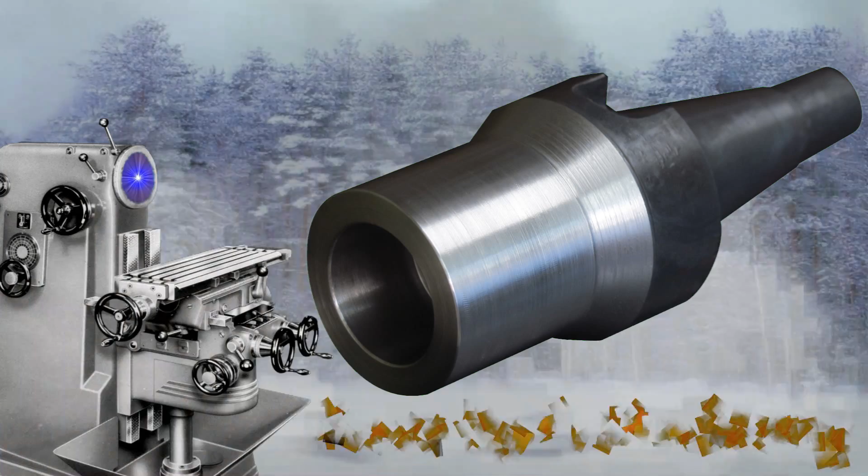In this episode of Finno-Ugric Machining, we are going to make an adapter for my milling machine for slitting saws. For now I have been using the ER40 collet with an adapter attached into it, and then you have the slitting saw. And it seems to be not rigid enough. At least it introduces some random play into the slitting saw. And I don't like that.

So I would like to have it directly in the SK30 thing. So what we are going to do today is something like this. We make this taper and this, and then this is an ER25 collet. But this end will be turned into a precise diameter, and then you have sleeves which you use for different sizes of slitting saw center. So that will be fun. And the material then.

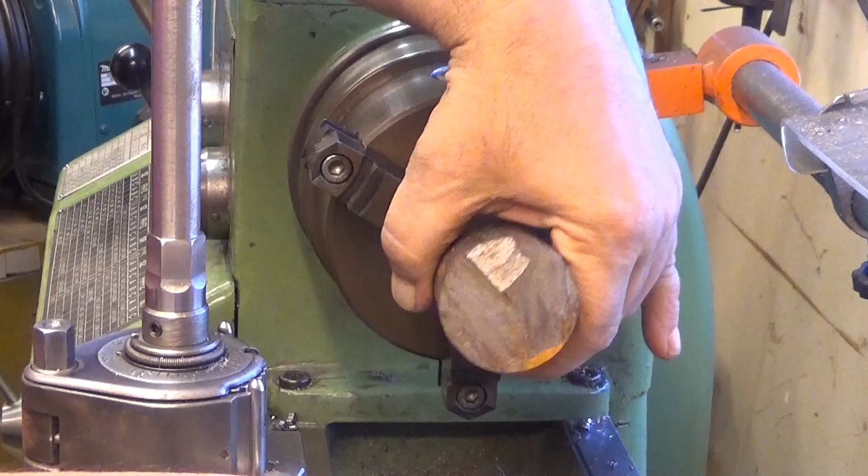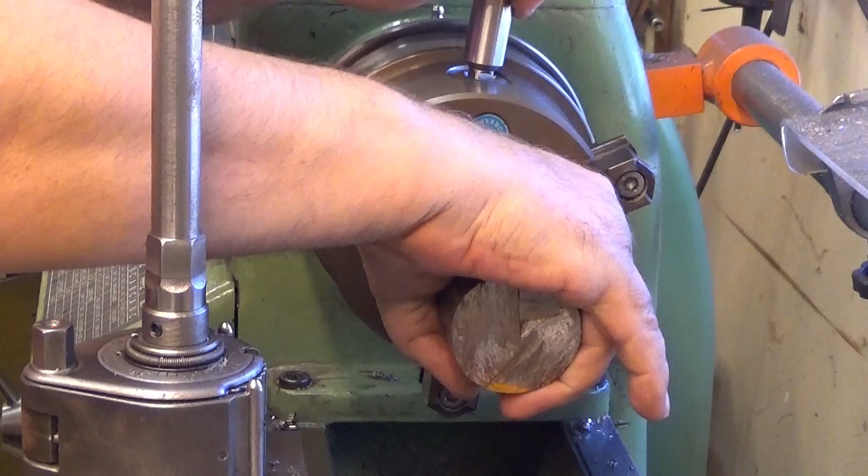One of the pieces I got off, and now, I really don't know how this machines. It might be really tough or not, but let's put it there and try it out. Okay, the outer surface is a little bit rough. Well, it's about straight. Now I just tighten this there. I will first face this, and after that I will make a surface here so that I can grip it into the jaws reliably.

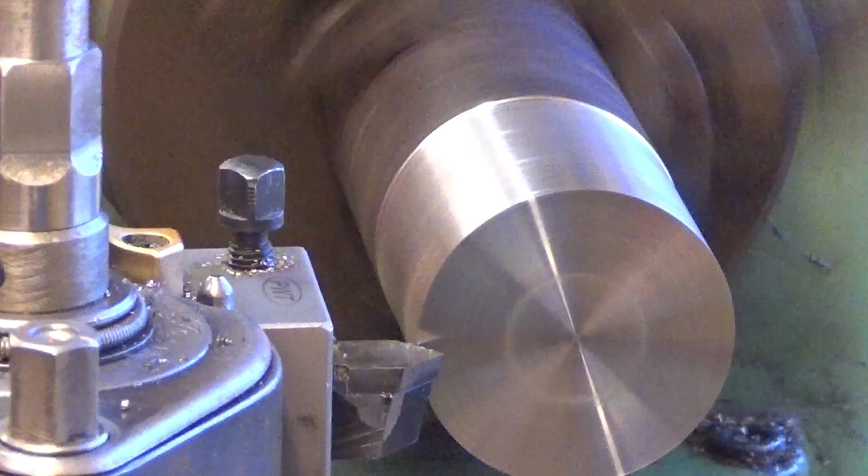Oh yeah. That's it. Yeah, okay.

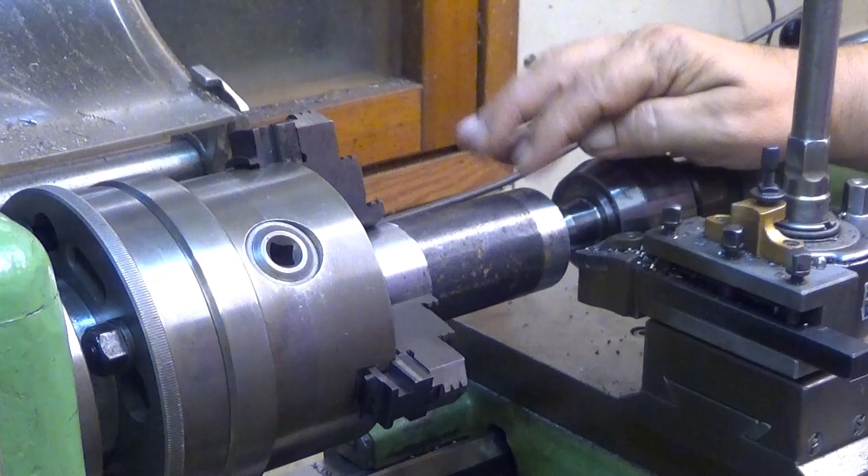After facing now, I'm going to rough this. The biggest diameter here would be of course this 50, but this I don't touch. And then the next diameter is 31.75. That one I will now rough turn, and it will be from this point here up to there, it will be 63.60, so because this is roughing, I will do it 63. The remaining 0.6 millimeter I will do when I finalize this.

So now this is just turning and yet turning. I already started here a little bit, so let's go to there. So now, enjoy.

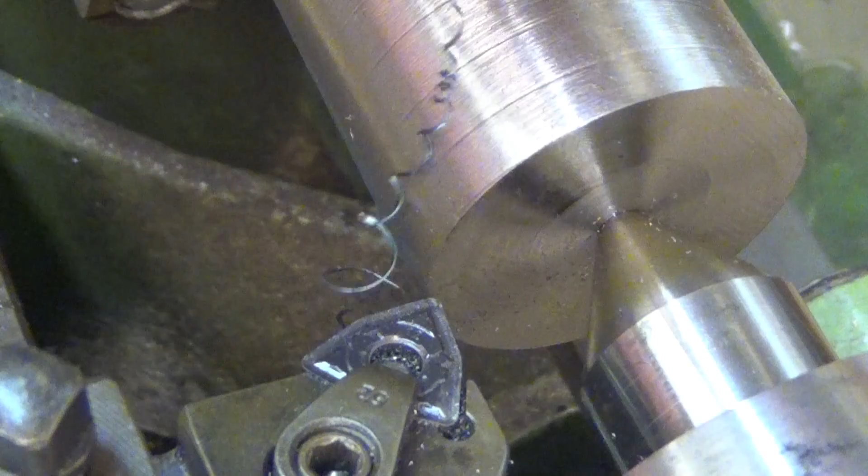This must be one of the hardest steels I have ever been turning. Well, first of all, the chips. Even though these chips turn blue like this, they are still not crispy. Usually when you get chips of this color, they crumble in your hands, but these, oh no. And it's quite hard, not really hard, but quite hard. But that's actually a very good thing. When I get this done to the correct dimensions, I have a very, very stout tool. So yeah, okay.

I'll take that. At the moment we are around 40 something. We have 11 millimeters to go from the diameter here. The speed at the moment is something like 400 revolutions per minute, and the feed is 0.076 millimeters per revolution, and the depth of cut, I'm taking 1 millimeter from the diameter. This lathe can do it, but not much more than that with that material. This is not aluminium, not at all. So it will be 1 millimeter cuts.

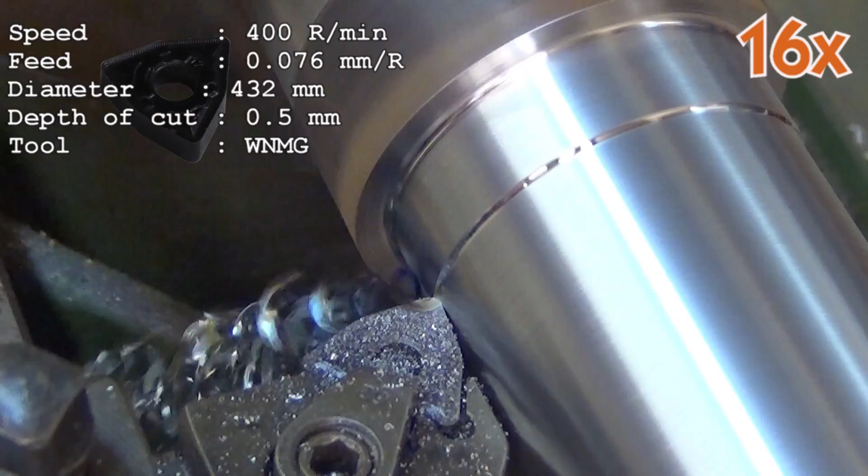Well, 9 more to go, and it's hot. I want it to cool down now. So, our goal here is 32 millimeters. The final dimension will be 31.75, but I will leave that much for the final passes, which are not done with this tool. And the surface is quite rough. 2 millimeters to go. So let's take the first one now.

Oh yeah, one thing: I had a cup of coffee and let this cool down. And it loosened the tailstock because this really cooled down. With thermal expansion, it shrinks and it detaches from the tailstock. And in this case it's a very bad thing because it will cause vibrations. So now we go. And this is faster now.

So, well, I finished that surface already. The diameter is at the moment 31.75 millimeters. Really, it should be 31.75. And it is exactly. My next step is to make this surface here in the back, the back face here.

I already peeled 0.1 millimeter off from that. Now I should peel off furthermore 0.5 millimeters. And this is a little bit delicate operation. I have adjusted this so that when this dial is at 0, the tip of this tool is exactly on that surface. And then I can advance with the compound, and I do this like 0.1 millimeter at a time,

because this is some really hard shit. I cannot peel any more. And the tool is a little bit tilted so that it doesn't start to vibrate. Well, so that's what I'm going to do now 5 times.

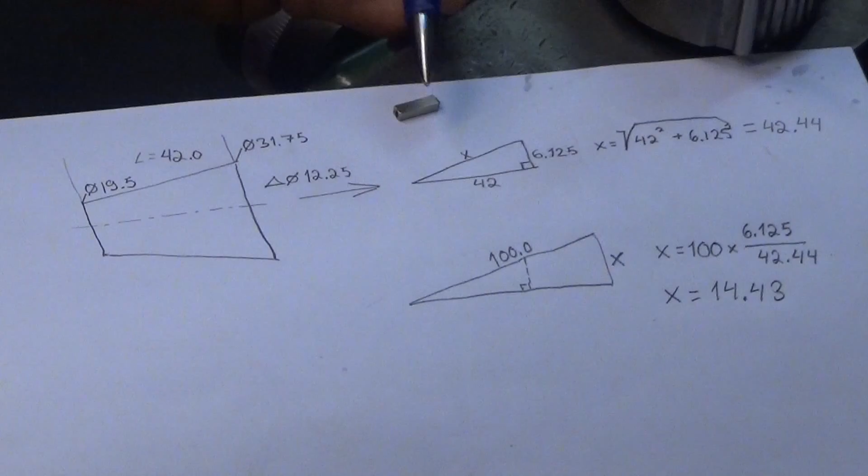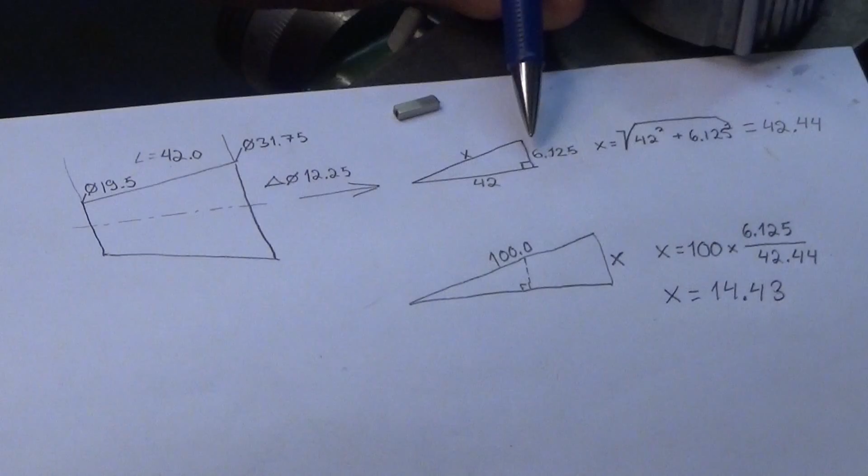Okay. Well, then we just create a triangle like this one. There is this 90 degrees angle. Then we have a side which I have marked as X. We don't know how long that one is. Then one side is 42 millimeters, which comes from the length. And this side here is half of the delta, so it's 6.125.

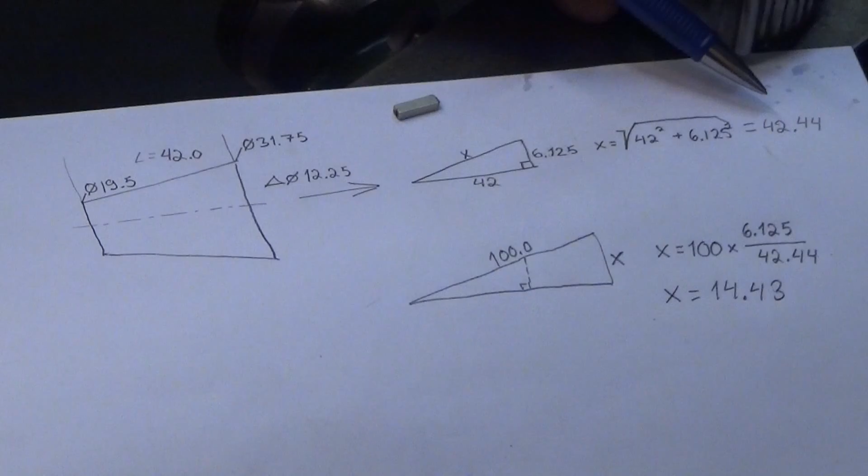And, well, this is just Pythagoras. So to get this one, we take a square root out of 42 squared plus 6.125 squared. And this will yield 42.44 millimeters.

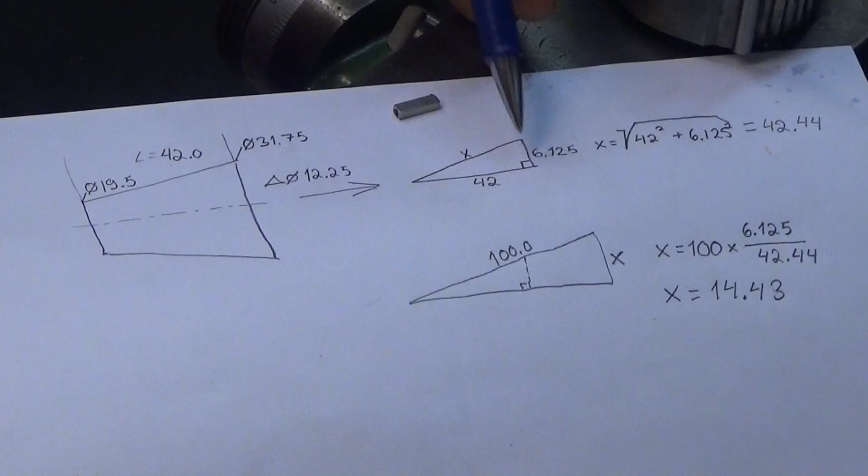Okay. Well, then assume that this triangle is like here. But now we need this side to be 100 millimeters. What will the X be? Well, it's actually very simple calculation. It's 6.125, which is this here, over 42.44, which is this here, and then multiply this by 100. And there you are. Then you get the new X, which is 14.43 millimeters.

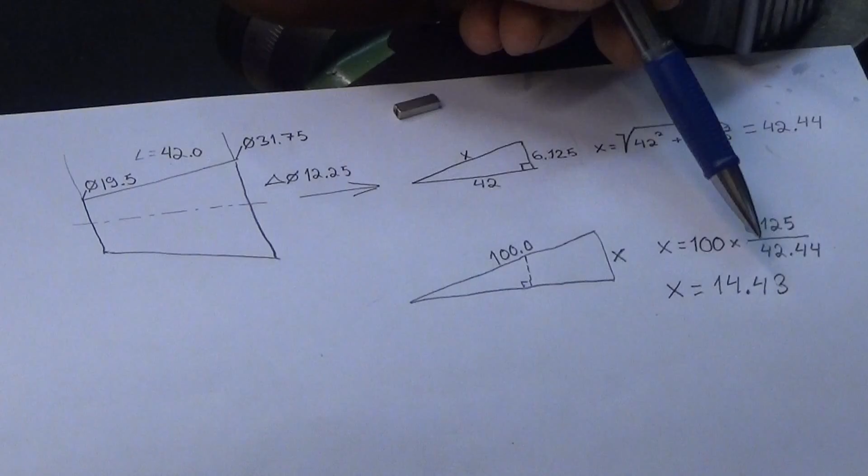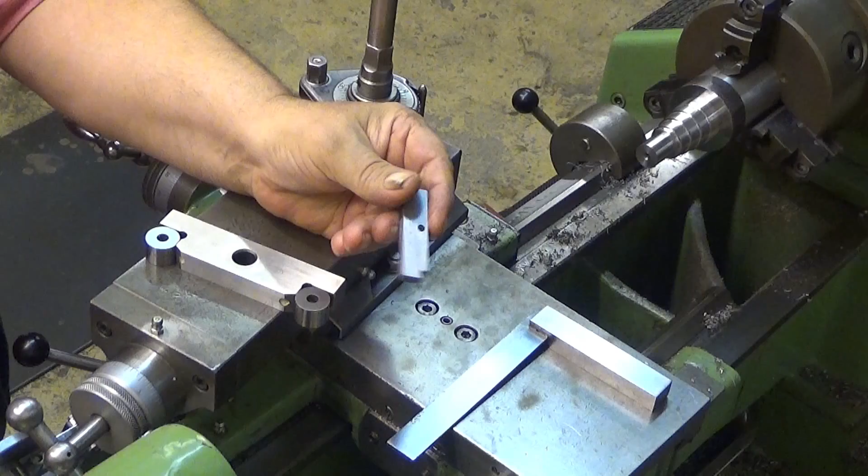And now, why 100 here? Well, let me show you. I have a sine bar. This one. This is 100 millimeters. The process needs three components. First of all, this one. The height of this is 14.43 millimeters. It's the X here. That's one. Then we need this 100 millimeter sine bar, which is this one here.

And then I need this to adjust it with the sides of my carriage. Well, then we just put this, and it goes without saying that when you do something like this, everything should be absolutely clean. Otherwise you don't succeed. Okay, then I put this here. And then this is my machinist square, so to say. I put it together, and I already adjusted this.

But what I do, I put this tightly against the side here, and then I push this gently here until it stops. And then I try if I can wiggle it on each end. No, I cannot. Okay. And same from the other side as well. This is just to make sure. Let's put it like that. That was a little far away. Okay, now it is.

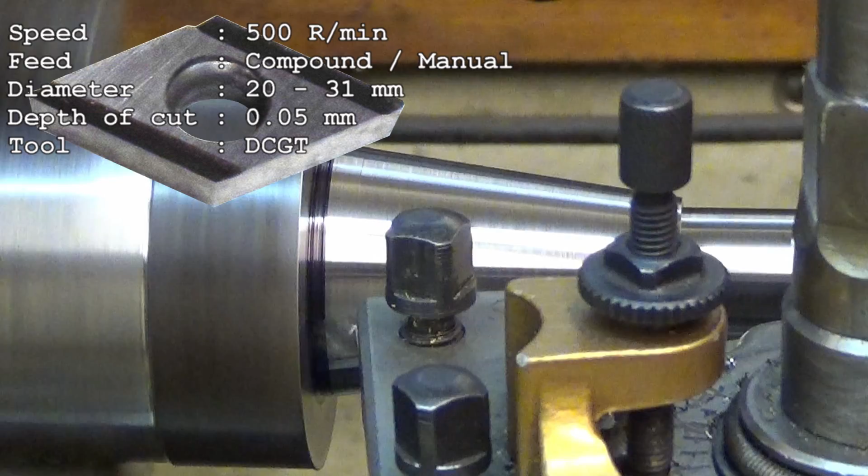It's ready. Very good finish, and yeah, okay. It's a good taper. Well, as the last step before going over to the milling machine to do something there, I will take care of this surface. My first thought was to leave this alone, just to let it be like it is, because now it's quite exactly the required 50 millimeters.

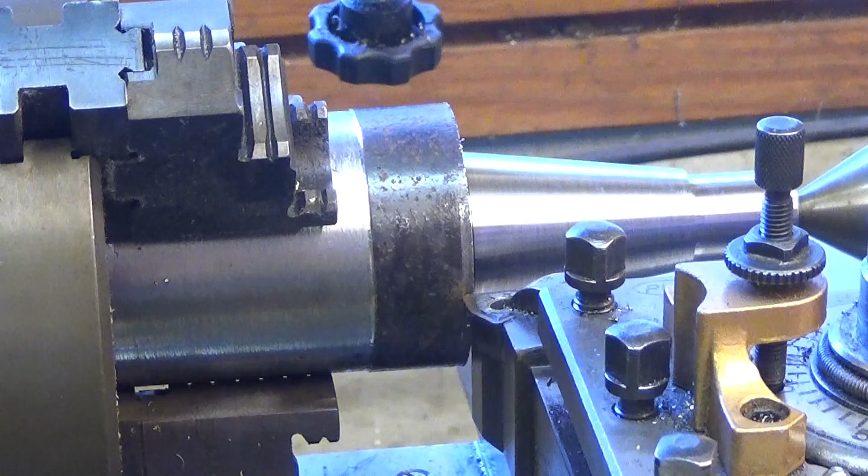But, well, the diameter of this surface isn't that critical. It can be a little bit undersized. So I will actually just clean it up. Peel off enough so that I don't have any of these. It's a little bit pitted, and well, it's easier to keep it clean when it's like that, if nothing else.

Milling the slots for the drive dogs in the spindle. And these slots should be 16.1 millimeter wide, and they should be in the X direction, this direction. They should be like 8 millimeters, but since this is a 10 millimeter end mill, I need to put some extra because of the radius. So 13 millimeters down there.

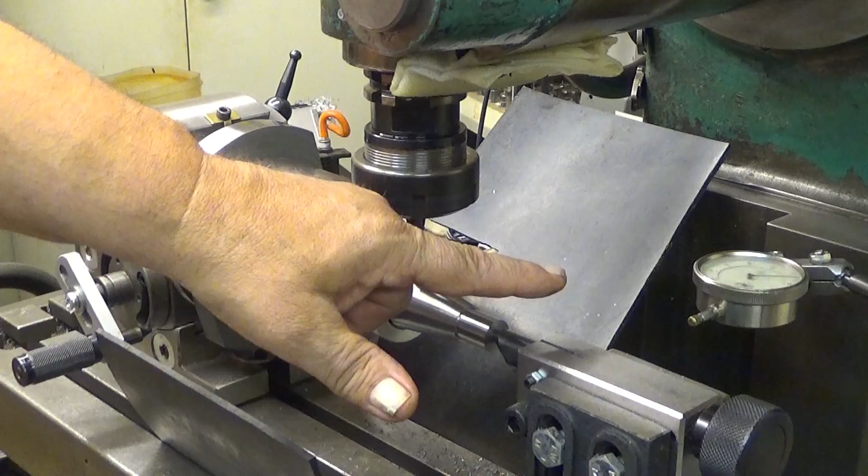And the diameter when these both are finished should be 32.4 millimeters. So these should be milled down to 8.3 millimeters each side. So I have a dial indicator there, which is used to measure the Y deviation, because this mill has a lot of backlash in both X and Y directions. So that was the most convenient way of getting rid of that.

So I'm running this 10 millimeter end mill at like 500 revolutions per minute, and I'm milling 1.5 millimeter layers at a time, because this material is really hard. So I don't want to strain this setup.

Something about this setup: I'm using the dividing head as a chuck here to hold the piece, and then I also can use it to turn the workpiece 180 degrees, because there needs to be another exactly on the other side. Then it's really important to have the tailstock here, because the cutting forces are both ways depending on which side I'm cutting. There will be also torsional forces when I'm cutting this end here. So everything must be quite tight and locked. So let's do the rest of this slot now. And I'm feeding this by hand.

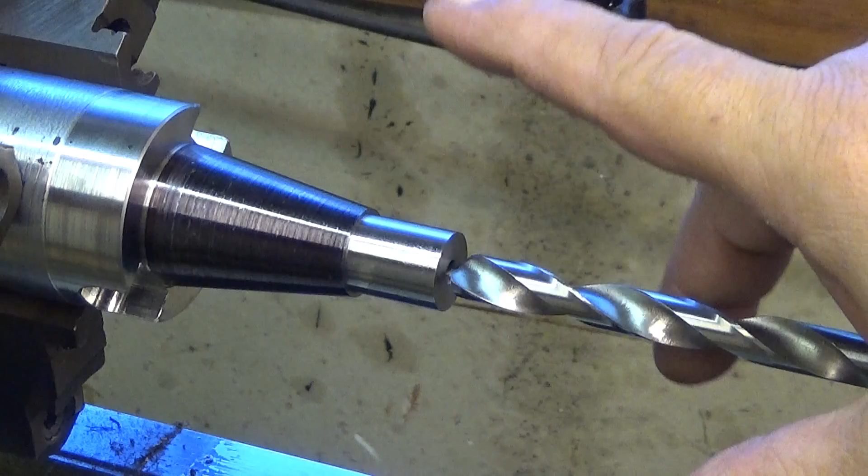Cutting size for M12. Well, some documents say that it's 10.3 millimeters. This is a 10.2 millimeter drill, and we shall see how we do with this stuff. I'm running this rather slow, somewhere around 180 revolutions maybe. This was really hard material, so let's see how this goes. And the depth of this hole should be 33 millimeters.

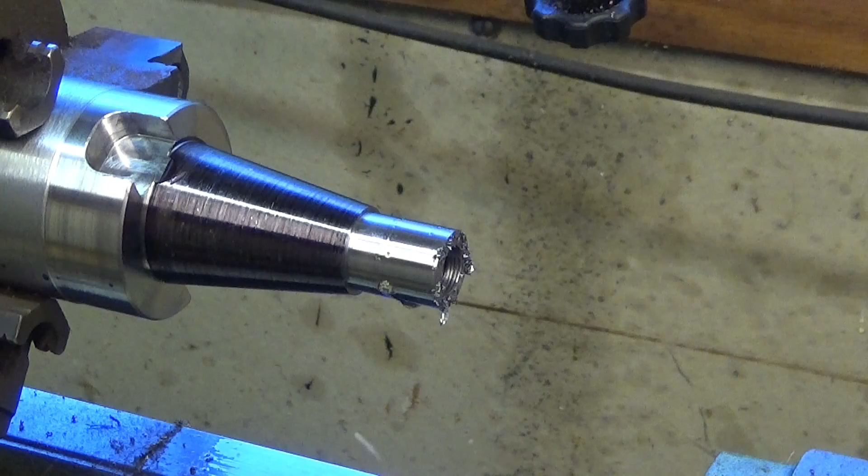Well, deep enough. That was not fun at all. This is like really hard stuff, man. Now, threading this M12 thread here. There is a real possibility of breaking my tap in this hole because this material, well, it's really tough.

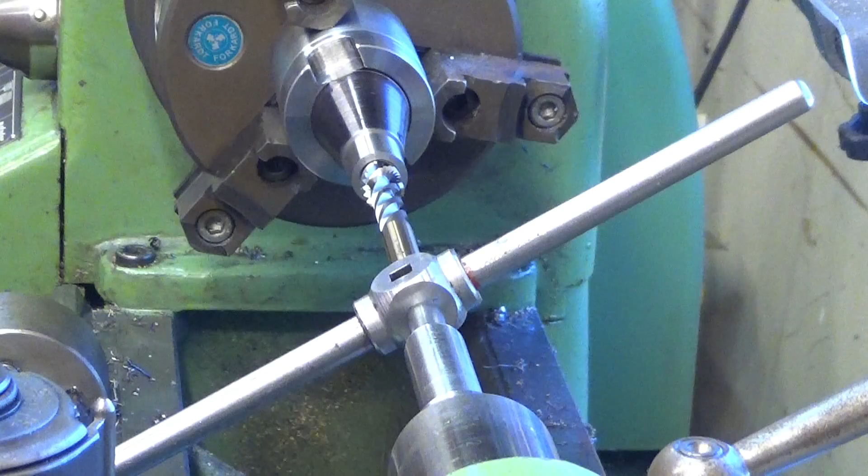At some point I did say that it's from a cardan. No, it's not a cardan. It's the power shaft of a lorry. I don't know whether it is really power shaft in English, but it's the last thing that connects the wheel to the, well, it's the last bit of powertrain, so a lot of torque in this one when it was in its original use. So let's see now.

It doesn't want to start even. Now it started. Okay. Oh, it's really tight. Really tight. Oh man. Am I sure I want to do this? Oh, this will be really... I want to position it. Okay. What now?

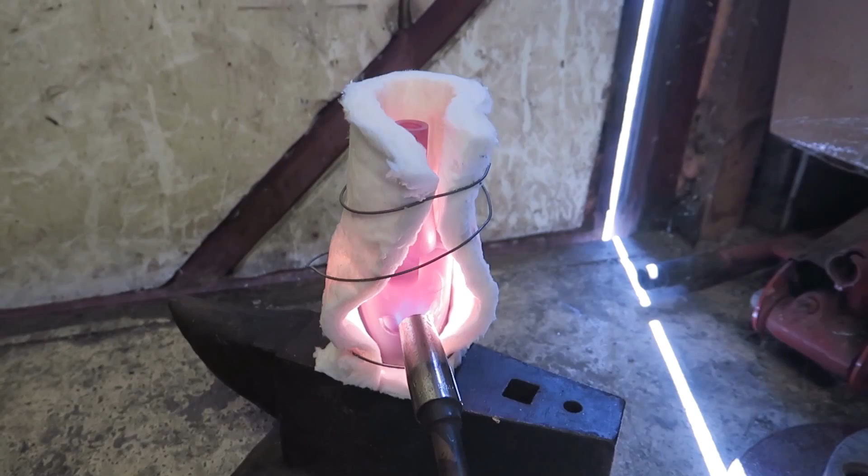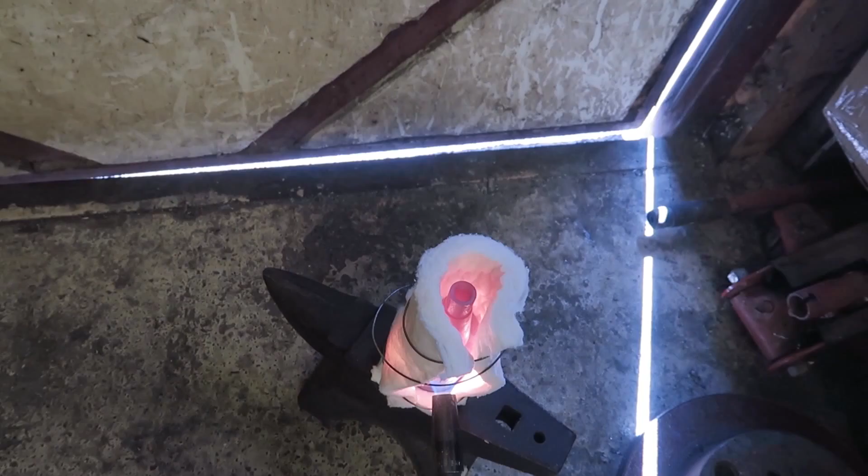I decided to anneal this darn thing. Annealing is actually a very simple process. First you just warm up the workpiece to high temperature, and then you let it cool down. The temperature should be, in this case I believe, somewhere around 600 to 700 degrees Celsius, and then it should be left alone, cooled down really slowly. In my case, it took about 4 hours. And after that, well, let's see.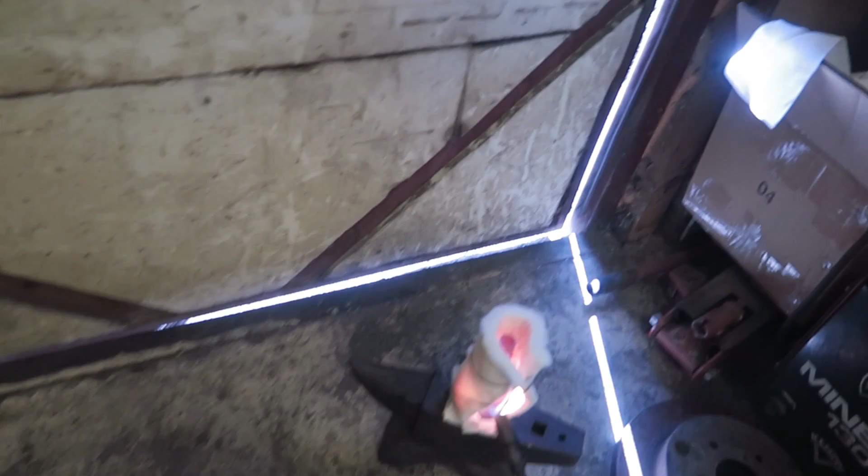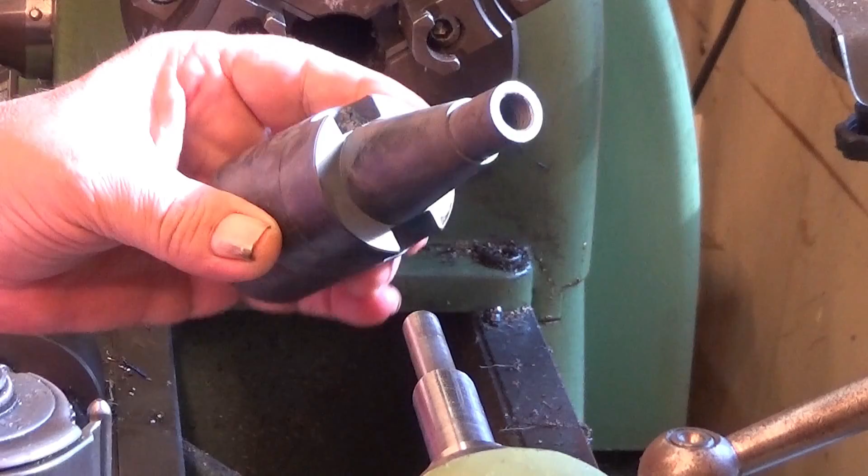Okay, here it is. No more shiny. But it's sure annealed. Or at least I hope so. So, did I learn something here? Yeah, I did. Never use mystery metals. Let's put some Rocol paste there, inside there. If I can now get it.

This will be hard to get out from there once I get it in. Okay, and then I also dip my tap to that same sheet. Just giving my tap a fighting chance here. Namely, now it will be make or break. Well, let's see now.

Yeah. Oh, wow. Let's see now. Wow, it's still really tough, but man, this is hard. It's tough metal. It's really tough. But it's more manageable. Man! Oh, 10 millimeters more.

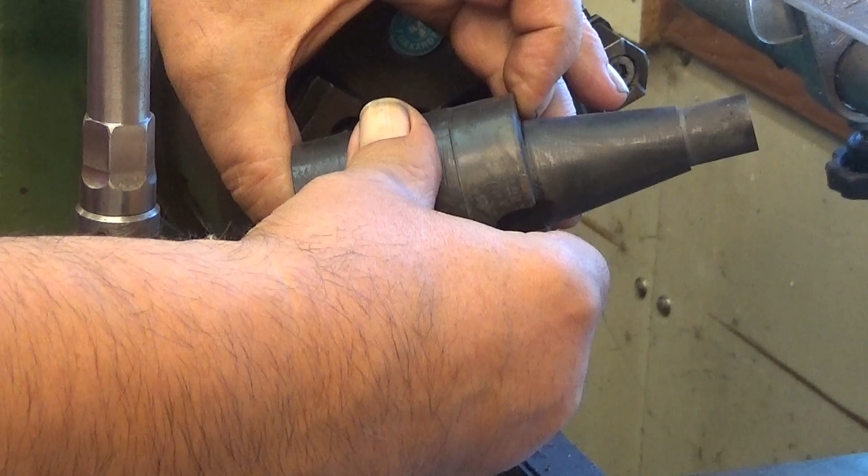Well, it might have deformed my taper. I don't think that's likely, but it might have. Doesn't look like a normal threading tap after this. I need to clean this up. This workpiece, the taper didn't suffer anything. It's as tight as it used to be on the milling machine spindle. Huh. Well, that's good. It didn't get oval shaped or anything.

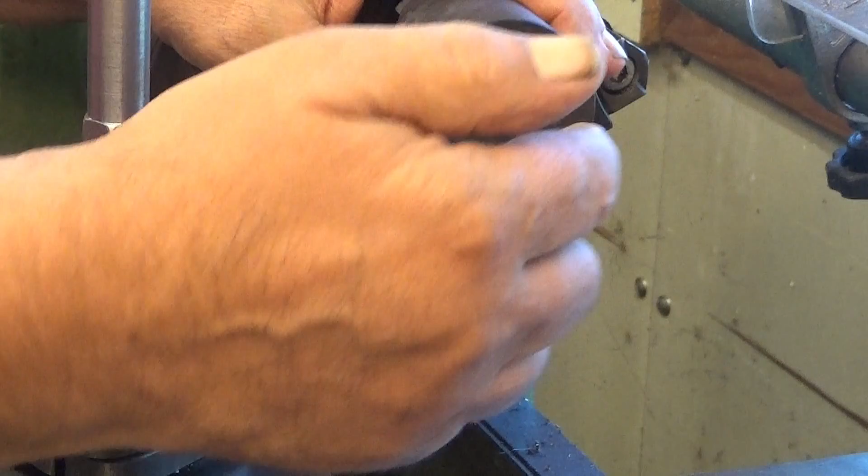Well, good. So the next step is to do something for this end, and this I will turn down to 40 millimeters. Now it's 50. And after that there will be a recess on this end and a thread so that you can attach your plates there. But

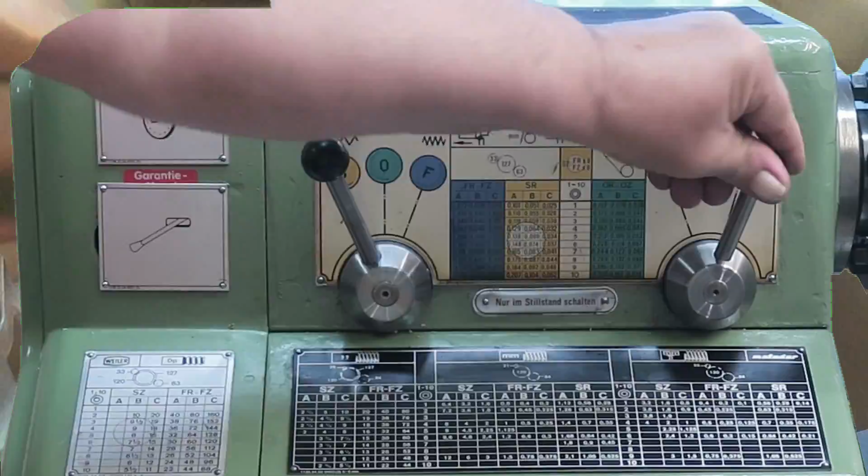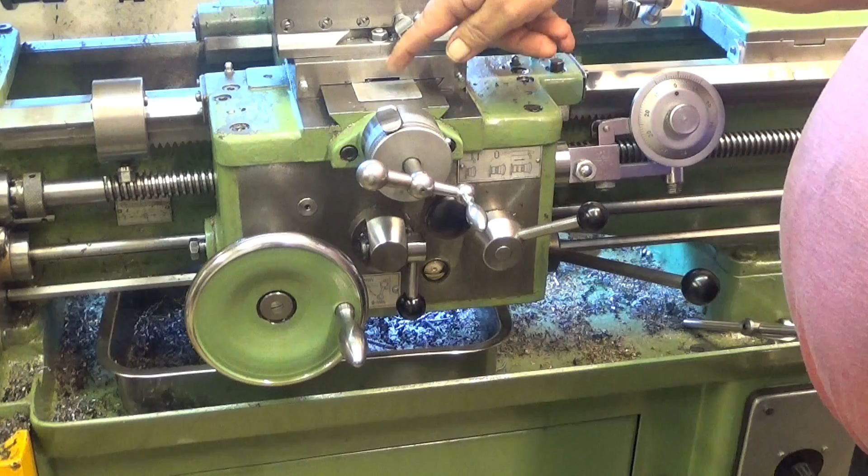it looks like my apron needs an oil refill. You don't run this one without oil. That's a bad thing to do. So let's fill it in. So it's up here, and first you have to move the cross slide a little bit away, but I will always wipe this really clean so that I don't accidentally introduce dirt inside there. And I already have some chips in a nut.

There is a hex bolt which has some... you shouldn't have anything here that goes inside there. So now this cover can be removed by loosening 2 screws here. And these screws you don't drop inside there, it would be disastrous. You would have to take the whole apron apart to fish them out from there.

Okay, now I take this cover off, and I can still see some chips here. Okay, now it's probably okay. So, yeah. And then I have some gear oil, and then I just pour it in like this. Something for the bearings and for that one too.

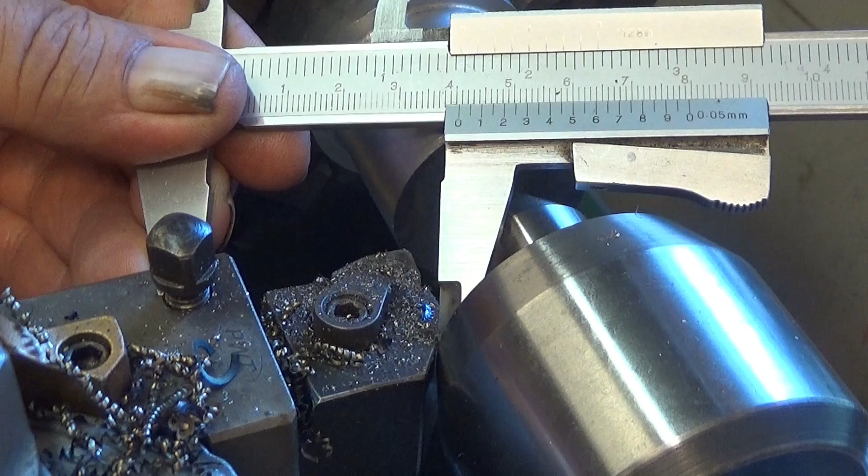Well, now that should be a little bit over 40 millimeters. Hopefully this focuses alright. It's a little bit over 40 millimeters. And I leave it like that because the final touches for that surface are done in the milling machine. And next we will do the chamfer here.

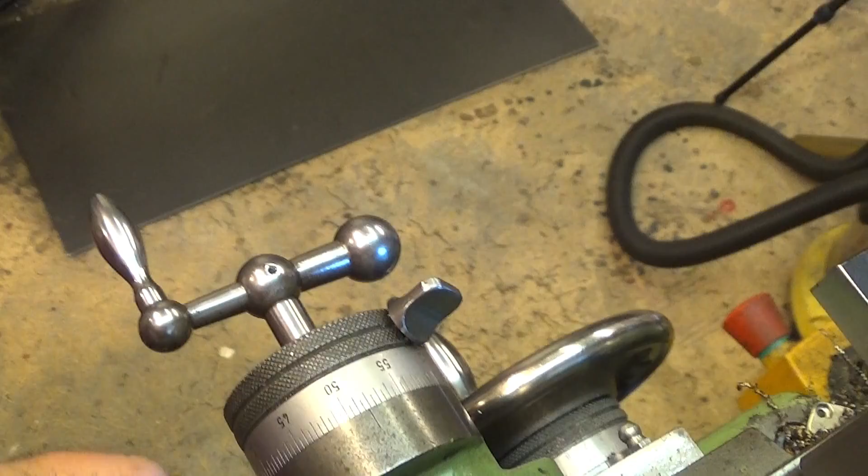But before that, before any tapers, I need to do some cleanup here, especially the floor, which is now occupied by some chips. Well, I have a good method for getting rid of those. Those cannot be vacuumed because they just clog the tube. I know. These are horrific. They attach to everything.

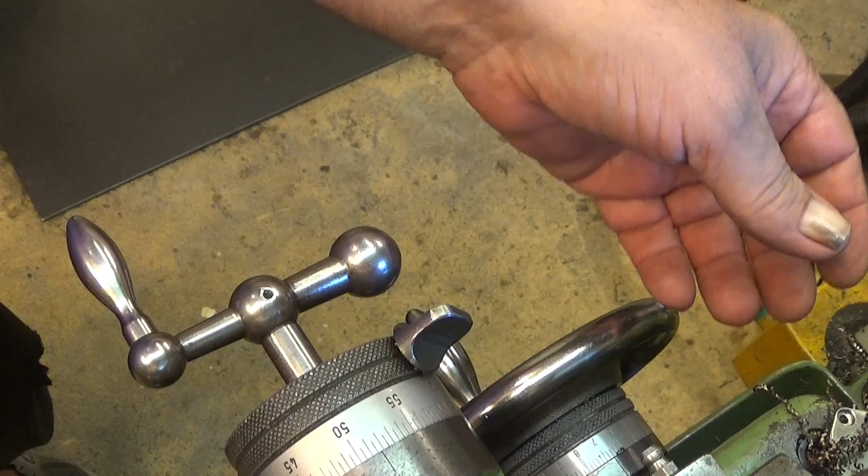So, as you can see, most of them are now in this brush. So let's see now. We have this collection here. Well, the plastic bag is here. And now the rest of this stuff is actually quite easy. You just wipe these away to the chip pan.

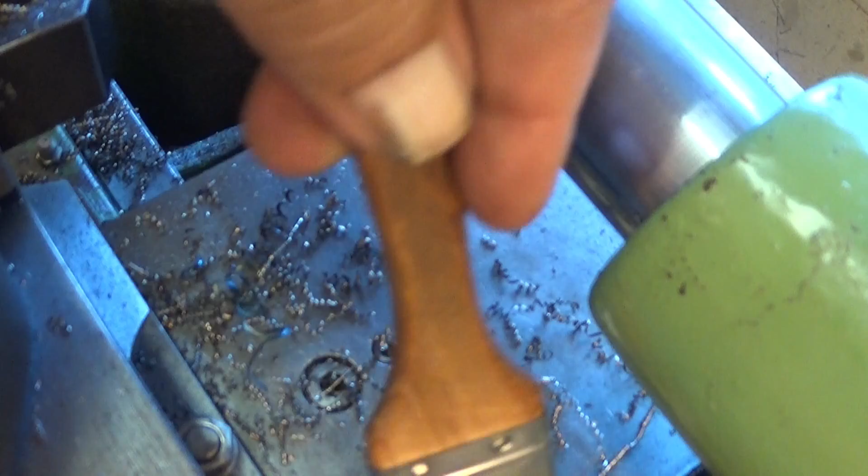And it's almost clean. So, as you see, I already started to make this taper. The compound is at the moment in 25 degrees angle. The correct angle would be 26 something, but this one, well, it should do. We shall see. And of course I'm feeding this with the compound, and I'm only taking about 0.25 millimeters from the diameter each time, not more.

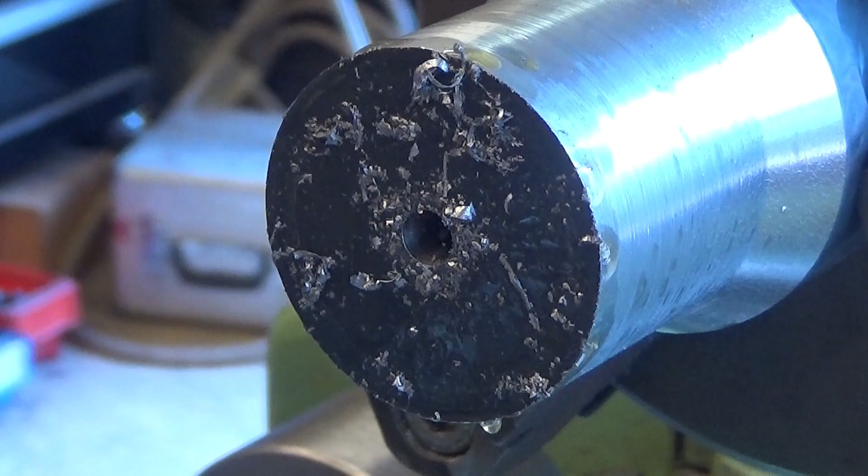This is now 8.5 millimeter drill. This is the tapping size for M10. And again feeding by hand.

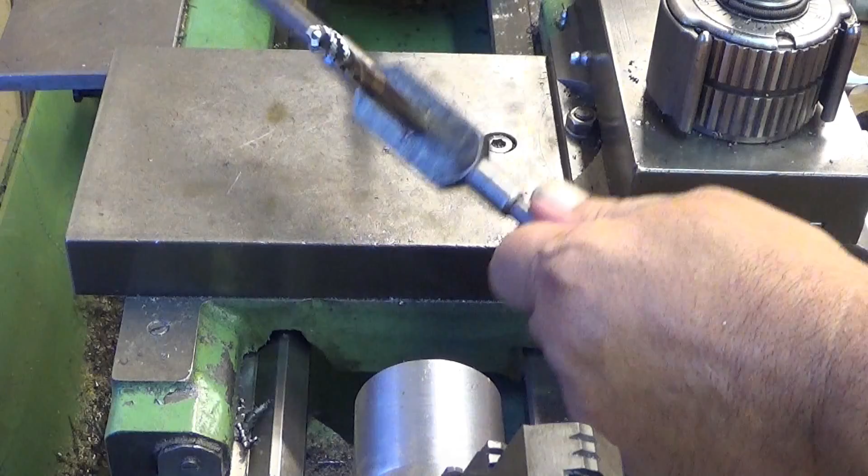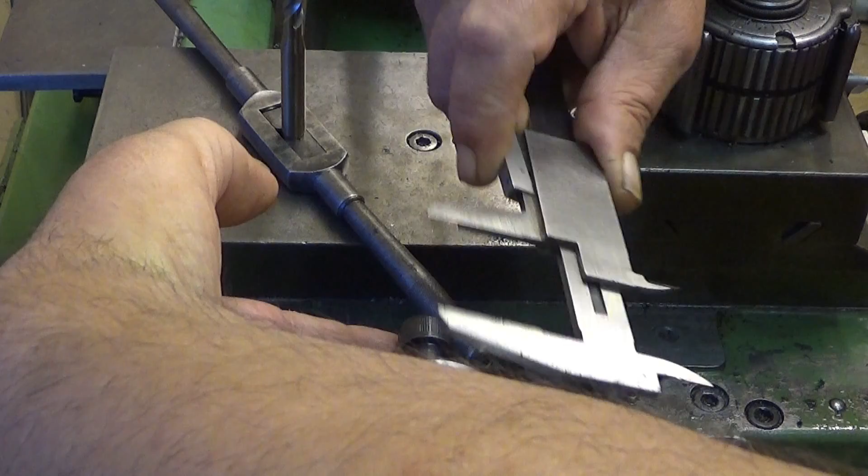And the workpiece is quite hot. Well, once again fighting against the odds. Oh man. Well, I need to thread an M10 thread inside there. And how deep? Well, the thread should be as much as this is now sticking out from there. I give it a little bit less if possible. That much.

And now, let's first stick in some of this stuff into the hole. Did it go in? Aha! Man, I succeeded in putting it into the hole. Normally it goes everywhere else, but not in the hole. Okay. And now also I dip this one into this same stuff. Like that. There you are.

Oh. Well, the lathe is off. Of course it's off. So we have a slight problem here. This one cannot turn the full round. So there you are. And now I need to rotate the spindle. It's in the back gear, but I can always free it a little bit and then rotate. Well, let's see. This is going to be, mildly said, exciting.

Basically we are already there, but I will do, just to be sure, a little bit more until I can feel that it's on the bottom. And now it's on the bottom. Oh man.

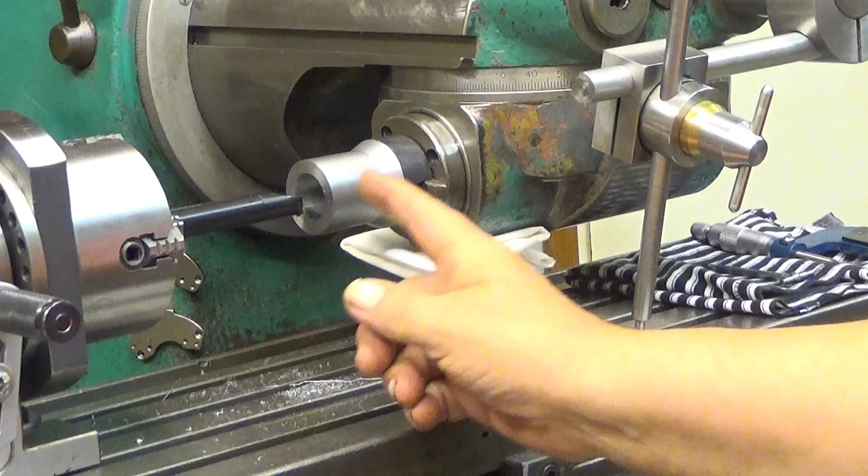So, typically you would do this kind of operation in the lathe, but I want this hole here to be exactly concentric with the cone. And therefore I'm doing it in this milling machine. So I will rotate that one, and then I have this boring bar, and then I have here a dial indicator which I'm using to measure my feed, and because we are measuring direct, every millimeter here will yield 2 millimeters in the diameter.

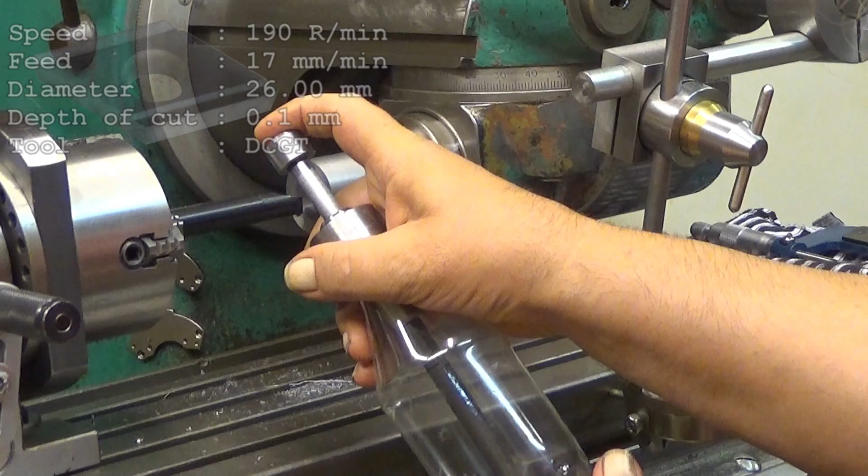So at the moment the diameter is 25.98, something like that, and our goal is 27. So we have about 1 millimeter to go. And let's put some cutting oil here. Then we just start.

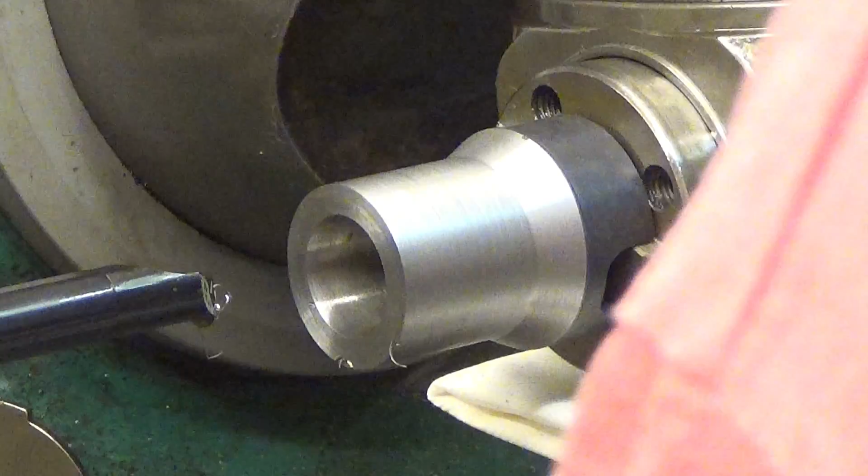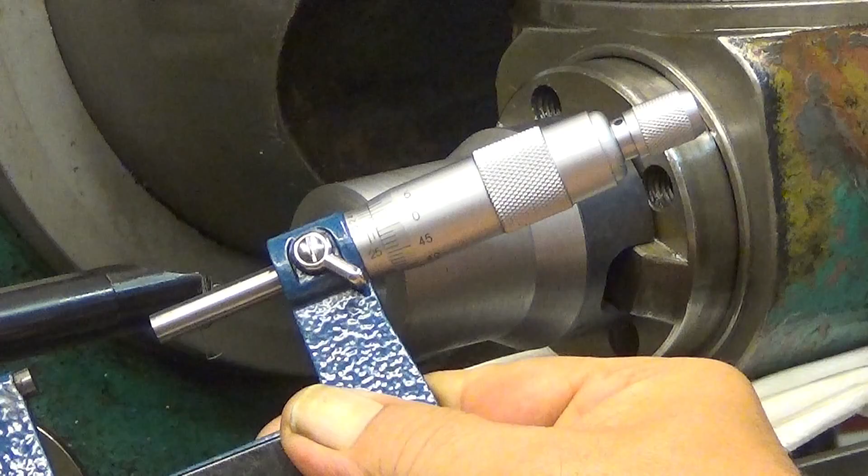That's it. Surface finish is absolutely gorgeous. Well, let's measure it. There is nothing much I can do if this is now wrong. So, we are 1/100th of a millimeter oversized, which is very acceptable. I should take care of the outside because, if you look at it, it's not straight. So what I would like to do here is to straighten it. And, well, front side or back side.

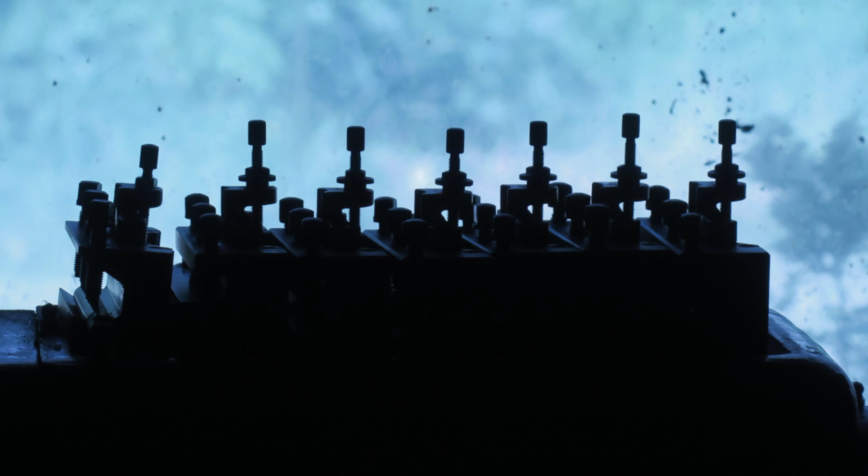So now we have this. I would say it's a usable tool. You have the taper. Amazingly it fits there really well, and now it's certainly running true. Making such a thing that has two parts on different sides running true in a lathe, so that it's concentric all the way, the only method I really know of is to turn it between centers, so then you can turn it around. But then this recess here, how do you turn that one between centers?

So now, I also measured this one, and it's 3 microns of play here at the moment. It's not much. And then of course I turned it 180 degrees to figure out whether this taper is somehow crooked. It's not. This is a really usable item. Now I just need to make some caps here to hold the slitting saws. Well, it's a good item.